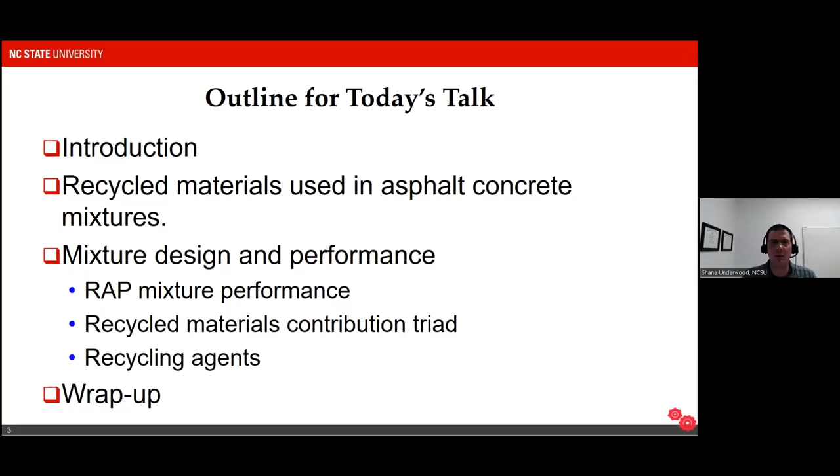So if we start with an introduction, when we look at the US and why we might be interested in recycling materials, it largely comes down to the scale and scope of our pavement transportation network. In the US, the pavement network is the largest civil infrastructure investment that our country has made. It consists of about 3.7 million kilometers of paved roads. Most of those are paved with asphalt, at least at the very top surface layer. If we look at the number of lane kilometers, it's close to 10 million lane kilometers in the US.

Each year in this country, by some estimates, we spend about $32 billion in US currency just on the materials that we use in those pavements. That does not constitute the additional 130 billion or so that we spend on the engineering, on the management, on the delivery, and other aspects. So we have a substantial investment in our infrastructure system here in the US, and a large portion of that investment goes into the materials that we use to pave our asphalt or our roads.

In the US, we also produce a lot of asphalt concrete. About 382 million tons are produced each year. That works out to be around 1.6 million tons per day if we're looking at normal production days, which is quite a lot of asphalt concrete to produce in a given year. And those productions go to repaving operations or new pavement construction. We have lots of different applications that we use for those asphalt concrete mixes.

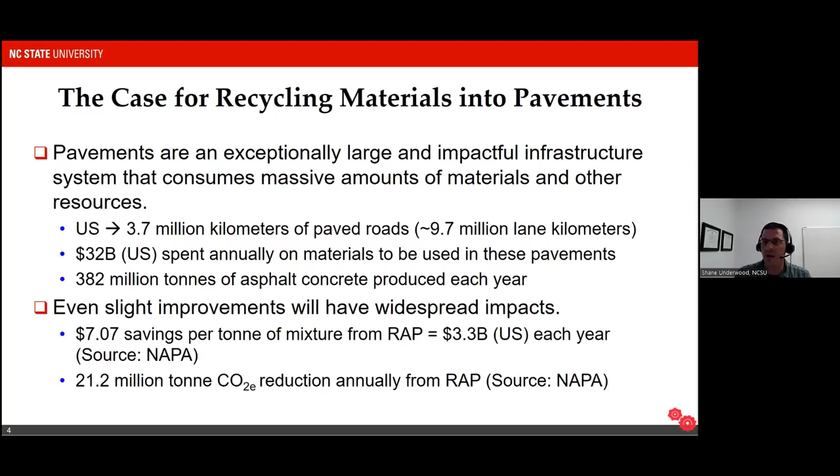Now, I've given you some benefits from an economic perspective and from an environmental perspective. But really, one of the big questions and one of the big themes of my talk today is a question about what is the total net benefit that we achieve when we use recycling materials. There is clear evidence that we obtain good initial reductions in environmental impacts, reduction in the cost of these materials. But what about things like cracking or rutting? As I'm going to talk about today, there is evidence that sometimes these recycled materials can lead to more cracking, perhaps less rutting, but so that's a trade-off. We might be experiencing some lower costs and lower net initial environmental impacts, but if the pavement is cracking and not lasting as long, then we actually have a net effect from using these recycled materials.

And so we want to think about those performance impacts across many different distresses, including, as I said, cracking and rutting, but also skid resistance. Asphalt concrete using reclaimed materials or recycled materials may have systematically different behaviors in terms of macro texture, in terms of friction behaviors, because the effective asphalt contents are different, because the mixes themselves might end up being finer. So we need to be worried about that. And this is growing in importance in the US as we talk about driver safety and pedestrian safety. We also need to consider how repairable these materials might be. Not in the case of RAP, but there might be some other recycled materials that turn into being challenging to recycle or reuse, and we need to think about that.

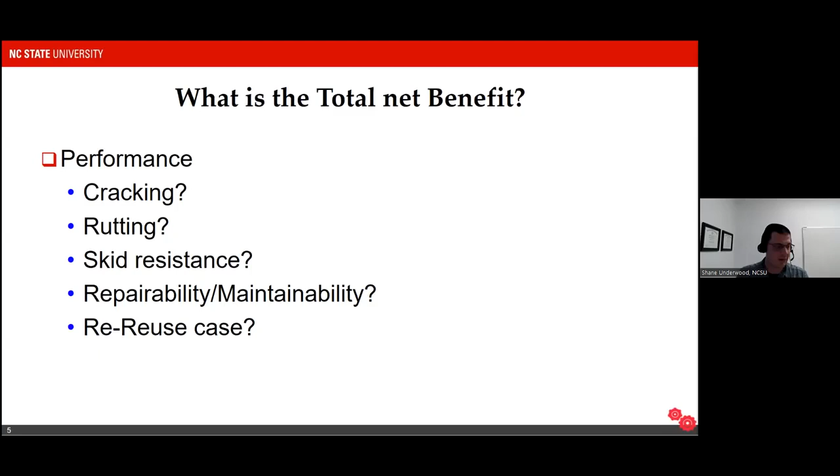So with that, let's transition to the next part of the presentation. What materials are commonly recycled into asphalt pavements? Well, we actually recycle a lot of materials into asphalt pavements. I think in the US, but also internationally.

I do not know what the Bolivian experience is with recycled materials specifically, but I know that it is widespread nationally to use recycled materials in some form or fashion. Usually owing to the fact that the system is so large that we're able to incorporate recycled materials pretty effectively. The first material I'll talk about is reclaimed asphalt pavements.

Reclaimed asphalt pavements, or RAP, are generally used in centralized plant-produced asphalt concrete mixtures at rates up to about 50%. Now, the 50% usage rate is considered high RAP in the US. As I'll talk about later, the typical dosage rates are much, much lower. I'm talking here also about RAP that is transferred back to a centralized plant and is mixed at that plant.

There are also applications of using reclaimed asphalt pavements in place recycling. I'm not going to spend any time on that. It is a prevalent technology here in the US and elsewhere, but I'm going to focus exclusively on centralized plant-based reclaimed asphalt pavement recycling.

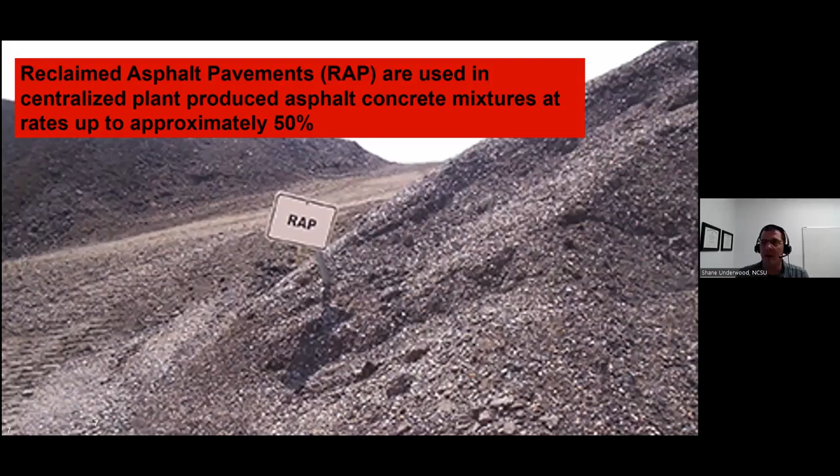Now, there are some facts that are important to know about recycling reclaimed asphalt pavements. Asphalt concrete pavements in general are considered to be 100% recyclable. We recycle a lot of asphalt pavements back into mixes here in the US. For the most part, 94% of the time, those materials are recycled back into pavements.

So a circular use of these reclaimed materials is an important part of why reclaiming asphalt pavements is so important. Most of the time, those recycling processes are used to bring the reclaimed asphalt pavement back into asphalt concrete. So a truly recycling application. A portion of those 94% recycled rates incorporate using RAP into aggregate bases or using them as shoulder repair, but the vast majority are recycled back into new asphalt concrete pavements to create a circular use of those materials.

In 2019, the last year that data was available on these recycled rates, we recycled in our country about 89.2 million tons. And I will emphasize that those are US tons, not metric tons. So less in terms of metric tons, but nearly 89 million tons of recycled material.

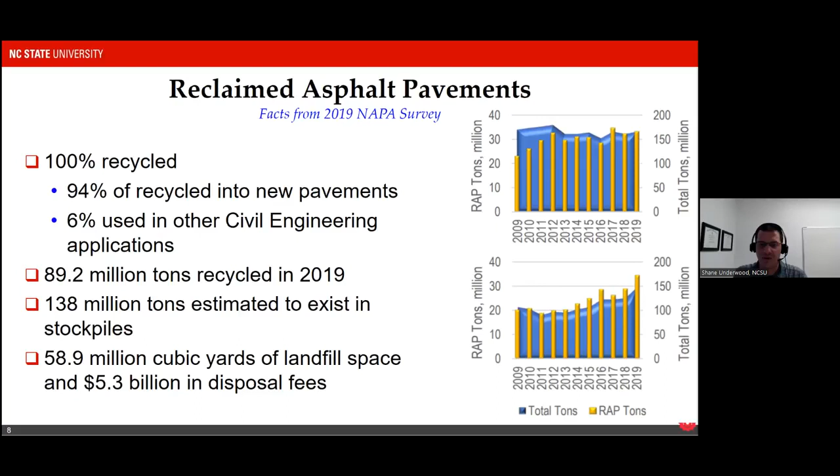Also see that not every state is as permissive as North Carolina is. So for example, the state of Arizona here in the western part of the US uses a lot less RAP. This state, at least the southern part of that state, is quite hot, and their concern stems from the embrittlement that may occur when RAP-based materials are utilized. If you average the dosage rates across the US, this comes out to be about 20%, which is used, again, across the US with quite a bit of variation depending on the exact state.

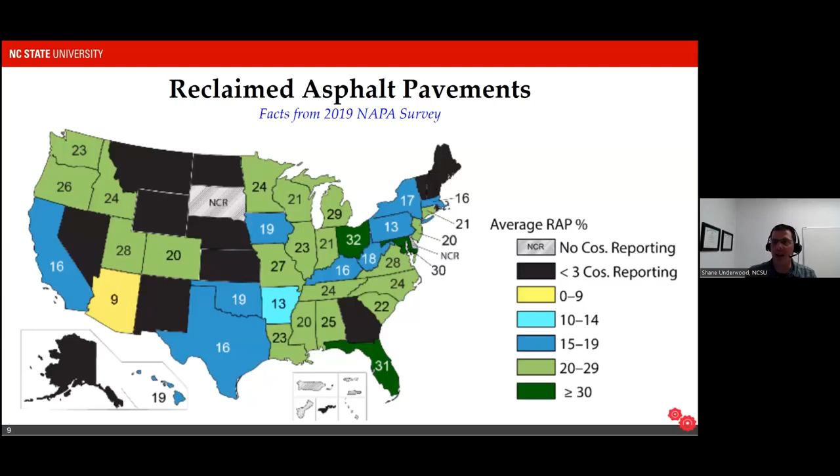ABC stands for aggregate base course, and it basically is the use or incorporation of reclaimed asphalt pavements into the aggregate bases. Now, this has some benefit because usually RAP materials are very fine graded, which means that they compact very densely, and depending on the time of year when they're placed, you may get some minor amount of cementing action from the aggregate base.

This is generally considered to be positive, but you also can look at the alternative, which is using reclaimed asphalt pavements directly in asphalt concrete mixtures, which has a higher net benefit. So there aren't a lot of states that use RAP in aggregate base as a normal operation, and part of that has to do with the value statement of using it as an aggregate versus using it in a more high value layer like the asphalt concrete directly.

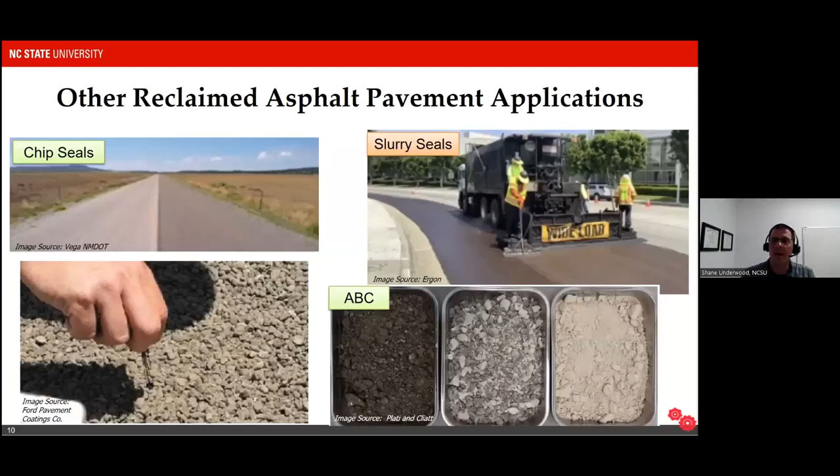A related material with RAP is recycled asphalt shingles. These are shingles that are either removed from the roofs of someone's home during a roof replacement, or they may be reclaimed from a manufacturer's waste. When manufacturers create shingles, they may actually produce quite a bit of waste that can be incorporated and used in asphalt concrete.

Technically, RAS is incorporated at up to about 5% dosage, much smaller than RAP, but the asphalt content for a typical shingle is much higher. A typical reclaimed asphalt shingle might have something between 20 and 30% asphalt binder content, so you use lower amounts of the shingles and get a total net benefit in the binder content.

As you can see in the images on the screen, there are issues that have to be dealt with, especially when we use tear-off or post-consumer waste materials. You can see these gentlemen in the upper corner dealing with leaves, backing paper, and lots of different components in this waste stream, as you would imagine from a construction site. You can also see in the image on the left all of the paper and waste materials that come with roofing replacements.

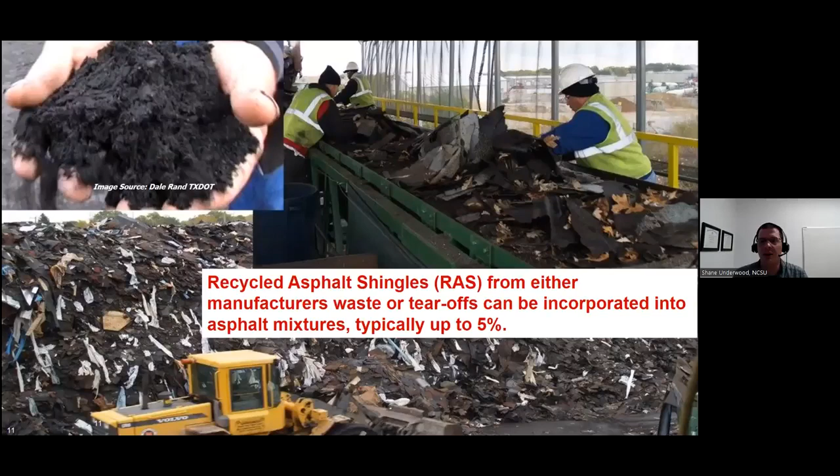Another image here just emphasizes that there are two streams of asphalt shingles. The so-called post-consumer asphalt shingle is taken directly from people's roofs. This material may have been sitting in service for 10, 15, 20 years, so it's going to be stiff, and it's also going to be much more varying in terms of composition and behavior. We can contrast that with manufacturer waste shingles, which are produced during the manufacturing process and represent a much more consistent stream, considerably less oxidized or aged, so they're a little more capable of being used in asphalt pavements.

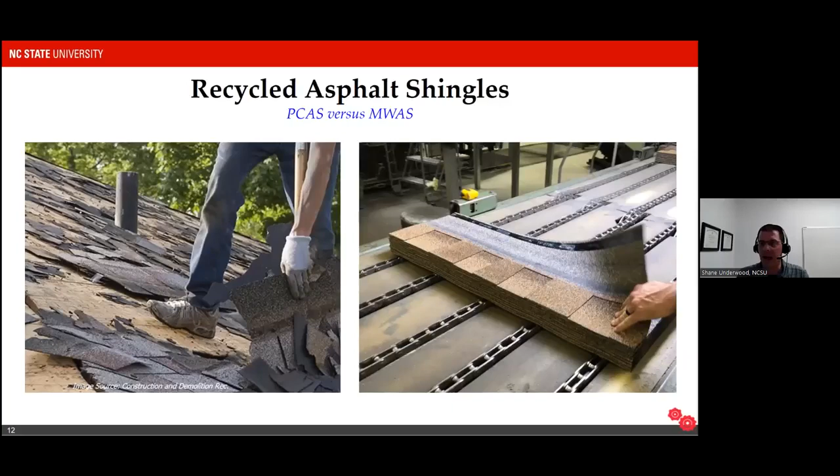The use of asphalt shingles has declined somewhat in the US in recent years. One of the reasons for the decline in asphalt shingle use has to do with the rheology of those materials.

So here I'm showing you a photograph from one of our students at NC State who was working with a manufactured waste shingle. This is actually the softer of the shingles, and this binder can, although it doesn't look like it, is actually heated up to about 150 degrees Celsius. You can see just how stiff and immovable this material is.

That's even more evident on the right. Again, keep in mind, this is binder that is heated to 150 degrees Celsius or more and still behaves as a brittle solid material. So we've got big challenges when it comes to using reclaimed asphalt shingles or recycled asphalt shingles because their rheology is so very stiff.

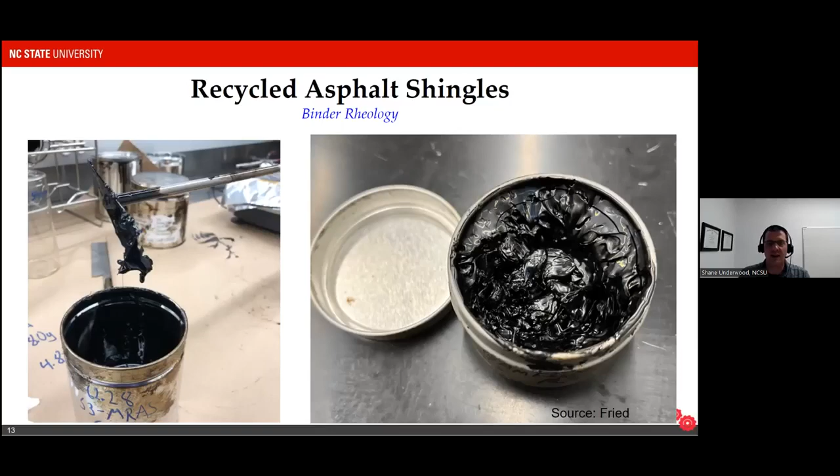There have been several studies to look at this issue. I'll show you at least one here to give you an idea. For those familiar with the USPG grading system, there have been various researchers who have tried to PG grade reclaimed asphalt shingles, and here are just some examples. A typical high temperature grade for North America would be a PG 64 binder.

You can see these numbers are degrees Celsius. If you're not familiar with the grading system, the fact that these numbers are almost two-thirds or twice as large as a typical grading tells us that they are very stiff, giving PG grades up to, in some cases, 175 degrees Celsius. This happens to be a post-consumer shingle, so this shingle would have been in this case, Alabama, in the southeast US, for up to 20 years and had aged quite a bit in that time.

Now, if you've ever run tests on asphalt binders that are this stiff, you'll know there's quite a bit of uncertainty associated with the very fact that it's so very stiff a material. So these numbers we should treat very cautiously. But what you can see is that the numbers are very high, much higher than typical, and they also range across a pretty broad number, from 121 up to 175.4.

So incorporating those materials into asphalt pavements, you would expect very different properties for the mixture using this high stiffness RAS versus a relatively lower stiffness RAS from the Minnesota case. This is just one study, probably about another half dozen studies out there that basically conclude the same thing: recycled asphalt shingles are very stiff, slow to rise, and may or may not actually be liquefied at a typical dosage temperature we'd see in an asphalt plant.

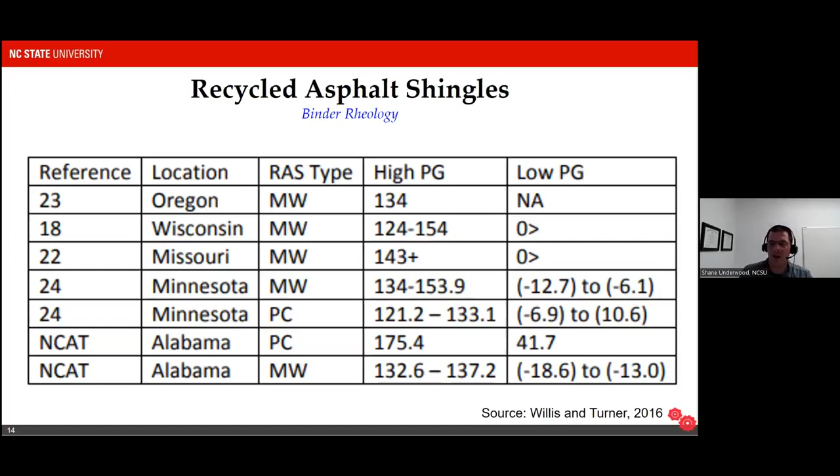A second challenge in dealing with RAS has to do with the aggregate particles themselves. The aggregate particles used in shingles are not necessarily as angular as the ones we use in asphalt concrete, but they can also have very different gradations than we typically see in the sand stockpiles we use to make asphalt concrete pavements.

I'm showing you one example of a case of 3 mixes: one having no RAS, this is just the gradation size, one having 4% RAS, and one having 3% RAS. I want to call your attention to the fact that in this 3% RAS case, we have this hump gradation right around the restricted zone in our gradation band. This hump gradation is a characteristic telltale sign of natural sands that will not compact well.

In fact, we see in this particular mix that it behaves very tender. This mix was very tender, whereas this other mix that had even more RAS, but from a different source, we don't see that tender behavior, and we don't see that change in the gradation band. So we have to be very careful when using recycled asphalt shingles, both in terms of how stiff the asphalt binder is, but also the gradation of the sand particles used in that shingle. All of that has to be taken into account and considered.

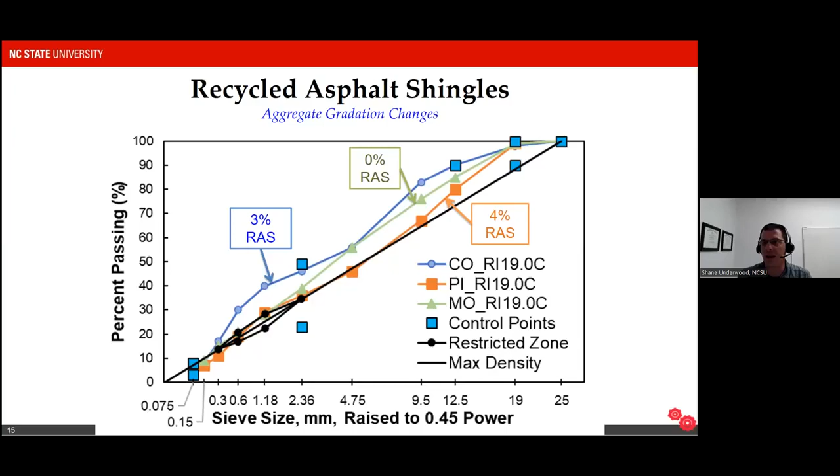Now, besides reclaimed asphalt pavements and recycled asphalt shingles, which are really important because they have asphalt binder with them, so we can get some potential benefits if we can mobilize the binder effectively, we also use other recycled materials. One of the hot topics in the US in the last 3 years or so has been the use of recycled plastics into asphalt concrete.

Now, the idea of using recycled plastics is not particularly new. There are examples of using recycled plastics at least as early as the 1970s. Those exist in 4 different countries that I found in our review, and there are probably more that I've missed, but we see usage in Europe and the US.

You also will find examples, especially in India, of the use of recycled plastics in one form or fashion in asphalt concrete at various times. Okay, so these plastics are being used. It's being extensively evaluated, and I'll talk about the types of plastics that are used.

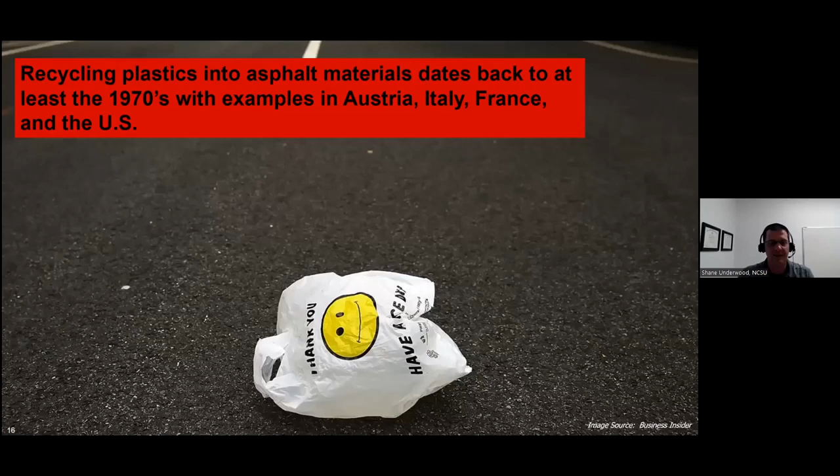Many of you are probably much more intimately familiar with the properties of plastics, but I'll dive into that just a little bit for those of you who may not be as familiar with recycling of plastics and the nature and properties of those. So when we think about plastics, we have to think about what kind of plastic it is, because as you all know, plastic is not in and of itself a material. It's a class of materials made up of varying polymers of varying length and complexity. That's usually indicated by the small little recycling symbol that you might see on your plastic water bottles or otherwise, that gives us an idea of what kind of plastic this is.

And I've put in this slide a couple of pieces of information that I think are going to be useful for us. So in the slide, we have the number. Normally in a plastic, you would see a small number on the inside of this triangular arrow. If that number is 1, then we have PET. If it's a number 2, you have high density polyethylene, and so on and so forth. Now, each of those materials has different applications, but they also have different melting points. I've highlighted 2 of the rows in this table because 2 of these are of actual importance to us in asphalt concrete. The first is high density polyethylene.

High density polyethylene is the kind of material that we use in pipes that you might come across in playground equipment and things like that. You might also find high density polyethylene in very, very stiff plastic bags, or even some soft bottles that we might encounter. The other kind of plastic that's relevant is low density polyethylene. Low density polyethylene is the very thin plastic bags that we might use for wraps around food. We might use low density polyethylene bags for shopping purposes or other kinds of things. And what you'll notice about the high density polyethylene and the low density polyethylene is that these tend to melt at about 130 degrees Celsius, or in the case of low density polyethylene, somewhere between 110 and 120 degrees Celsius.

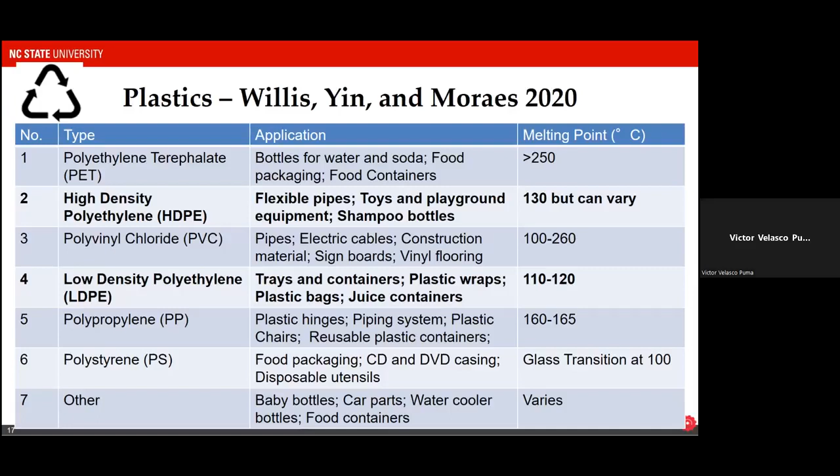Now, with plastics and recycling plastics, there are two basic processes that are used, the so-called wet process and the dry process. In the US, we're most interested in using the wet process. The wet process is essentially a case where we're incorporating the plastic directly as asphalt binder modifiers. So think of this akin to using SBS modified asphalts, where those plastics are directly incorporated into the asphalt binder.

That's typically done at a dosage rate of about 2 to 8%, and we'll generally use low density and variants of low density polyethylene. So we're generally going to be using, for wet process analysis, polyethylene materials.

In the dry process, we actually will use the plastic as aggregate replacements. Now, in this case, these plastics are going to be very high melting temperature, very stiff, well cross-linked polymers like polypropylene, polystyrene, and the PET that I described earlier. These materials have to stand up to temperature production issues but can be used in applications. Again, not very common in modern usage in the US. I believe this is a pretty common way of using plastics in some Indian applications, however.

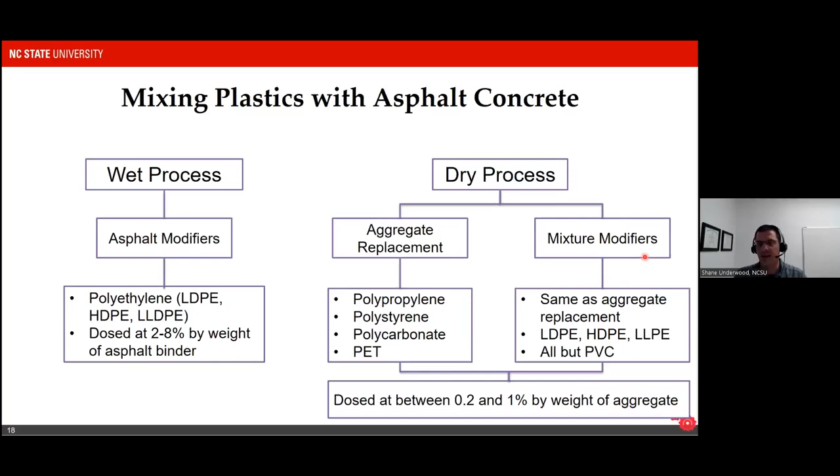So we do have different methods. Again, in the US, most of the interest in using recycled plastics in recent years has focused very heavily on using the wet process. There are applications of using the dry process, treating them as mixture modifiers, where we can add it directly into the mixing drum as a filler-based aggregate or admixture.

I'll point you to one excellent resource for more information if you're interested. And this is an article or a book that's freely available online, produced by the National Asphalt Pavement Association. Some of you may be familiar with this, but this was a bit of work produced by NAPA and the National Center for Asphalt Technology. They lay out a lot of the issues and limitations with using recycled plastics, including the issues that I list on the left side of the screen.

So one of the challenges with using recycled plastics is that there is not an entire system built around specifying and sourcing the recycled plastics. Right now, it's very much being used in a research case. So you might see examples of DOTs using them, but they're using very special provisional specifications. We don't have standards to describe the specific gravity measurements of recycled plastics. There are not established standards in the AASHTO or in our transportation agencies to deal with melting temperatures and differentiating between alternative plastic sources and their differences in melting potential.

We also don't have established methods in the transportation community to deal with ash content of post-industrial recycled plastic versus post-consumer recycled plastic. So there's a lot of unknowns in dealing with sourcing of these materials. It's easy for us to say we're going to use a load of recycled low-density polyethylene, but there's a lot of engineering differences between the materials that might collectively be classified as low-density polyethylene.

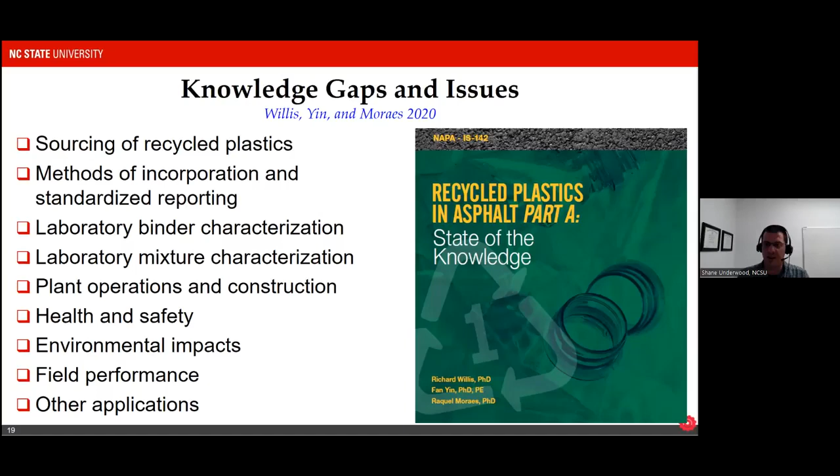Another material that we often use, this comes in and out of fashion every 10 years or so in the US, is rubberized asphalt binder and terminal blended asphalt rubber. We use these to eliminate tire waste. Generally, the beauty of using crumb rubber or rubberized asphalt is that it not only uses a waste stream, but unlike some potential for recycled materials, using this waste product actually improves the asphalt concrete itself. So it's a double benefit. You reduce environmental impacts, but you also create a longer lasting asphalt material.

So crumb rubber, we use about 15,000 tons, that's US tons, in the US. In the case of rubberized asphalt, those dosage levels are usually around 20 to 25%, coupled with a gap-graded asphalt gradation. The state of California has been championing the use of terminal blended asphalt rubber in dense graded mixes at dosage levels in the order of 5 to 8%. They are not necessarily getting the benefit from the performance of the rubber at those low dosages, but they definitely get the environmental savings of finding a positive reuse for the rubber materials.

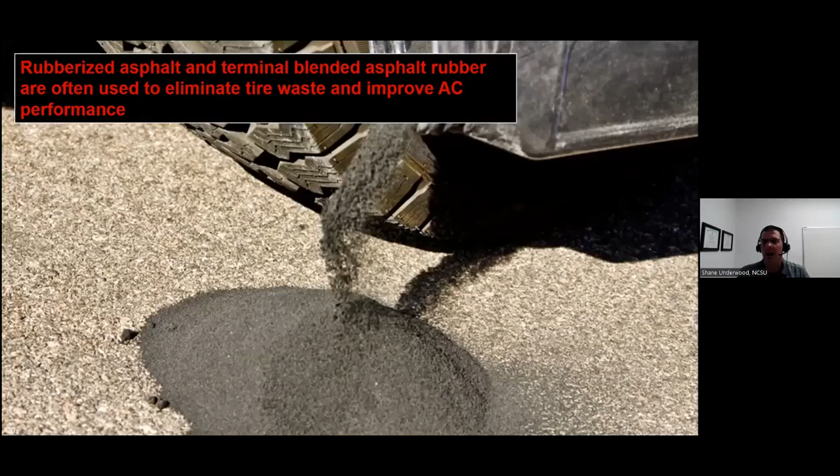Again, not in as much favor as it was 20 years ago, but there are also examples of using rubberized friction course. These are usually open graded friction courses that help to cut down on pavement noise. In the city of Phoenix, where I used to live, the freeways in that city were all covered. This was probably 15 years ago or more, with a surface of about 25 millimeters of rubberized friction course. And this cut down on the noise considerably. If you've ever been to the city of Phoenix, you know that the homes are usually built right up against the freeway. Those were topped with Portland cement concrete, and then this rubberized surface course was placed on top and cut down on the noise significantly. So much so that the citizens actually voted to increase their taxes to pay for more widespread usage of these materials.

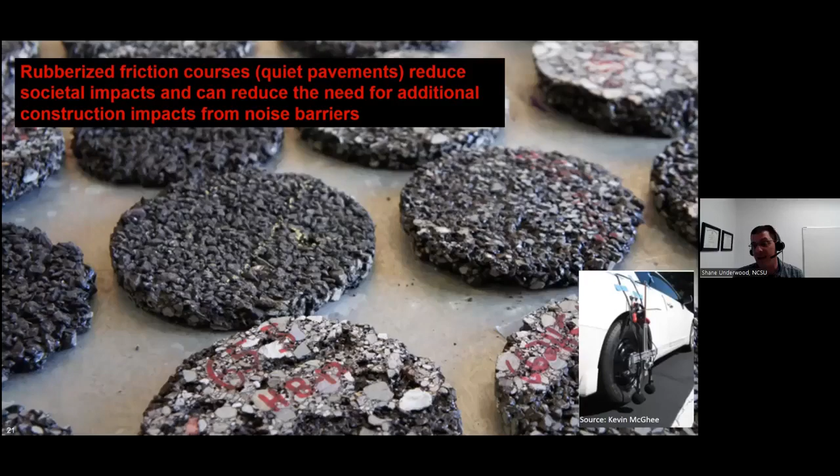These are the main recycled materials that we find in the US: RAP, RAS, rubber, and in a growing way, plastics. But there are lots of other materials that we use as well. One of them of note is called glassphalt. Glassphalt essentially includes processed glass as an aggregate replacement. This is used extensively at a time in the city of Baltimore, in the Northeast, more in the Northeast and Mid-Atlantic part of the US.

It's not widespread, mainly because the economics don't often work out. In order to make glassphalt economically viable, you usually have to have a municipal glass processing plant and a municipal asphalt plant, because there, as a city, you're diverting the waste stream directly to another source of material that you as the city are buying. But not many states find this as an economically advantageous use of glass. One of the minor issues that we worry about on glassphalt is skid resistance, because the glass particles themselves have a very low microtexture. That's usually controlled by keeping the volume at a fairly low value. You'll also see glassphalt used in non-roadway applications like sidewalks, parking lots, some residential streets, etc.

There are also examples of using coal and non-coal combustion byproducts like fly ash. We know fly ash is used extensively in Portland cement in order to lower the environmental footprint of that material. But there are also examples of using fly ash in asphalt concrete. In the US, this amounts to about 11,000 tons in 2019. The material is just metered in as a normal material would be, but it's not very widespread. Only a few states are doing it, but there are examples where this is a viable waste stream.

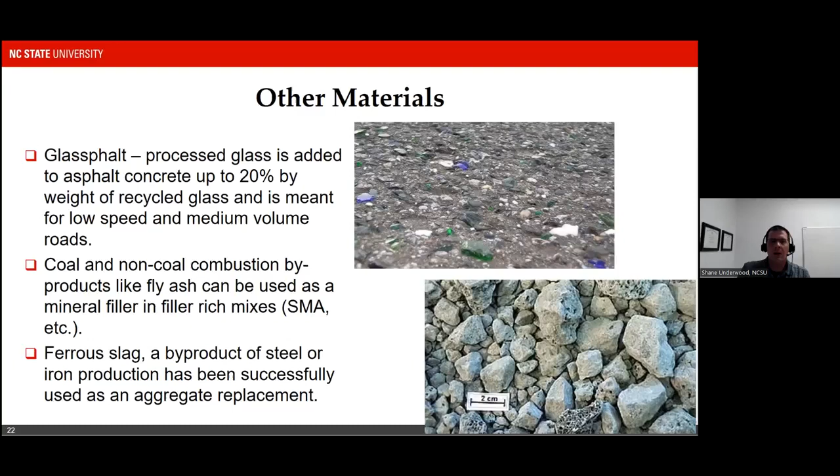All right, I'm going to shift gears a little bit now to talk about performance. So I've given you background on what materials are often used in asphalt concrete pavements, and I want to talk a little bit about an important component, which is the performance of these materials. I'm going to talk specifically about RAP, but this applies to all recycled materials.

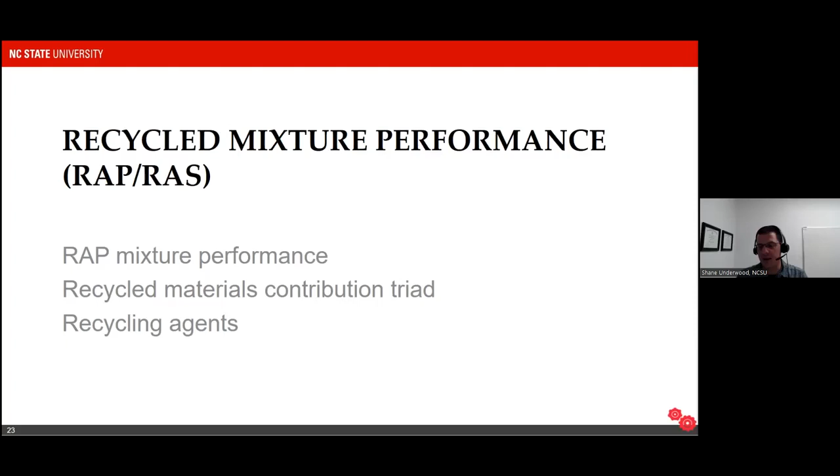We can see a major net benefit of using recycled materials. There's an economic savings, there's an environmental savings, but what's really important to think about is whether or not the long-term performance benefits are there. Because even though it may cost less and it may have fewer impacts, if you're having to replace the material more often, then the actual benefit is lost, and you don't have that in the long term.

Now, if you look in the literature, you can find literally thousands of papers on whether or not reclaimed materials perform better or worse. And the net outcome of all of those studies is it depends. Some studies find that reclaimed asphalt pavement materials perform adequately or equal to non-RAP materials. Some show that they perform worse. The general consensus is that RAP-based materials perform better when it comes to rutting and permanent deformation, but not always—there are plenty of studies that tell us something different. The consensus is also that RAP-based materials have the potential to increase the brittleness of our materials and therefore negatively affect the cracking performance.

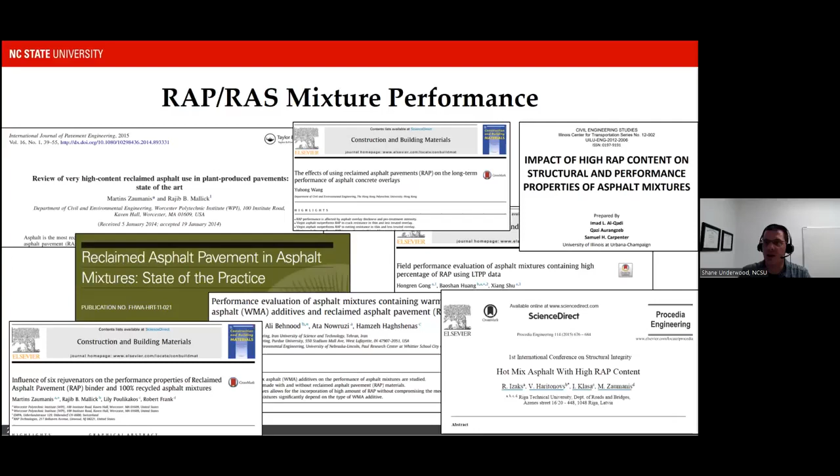I want to talk about one small study that we did some years ago now for the state of North Carolina to investigate this. So what we did in our study was we obtained typical mixtures from the state of North Carolina. We obtained surface, base, and intermediate mixes. And then we obtained for those mixes so-called RAP equivalents.

Now, the RAP equivalent mixtures are produced using the same basic component materials, but using a mix design that incorporated RAP aggregates or RAP material into that mixture. Now, in our study, we used a fairly low RAP content, about 15%. Remember, this was done several years ago when that was a typical dosage rate in the state of North Carolina. That dosage rate has now increased to closer to, as you saw in the previous slide, about 24% on average. But we were looking at a fairly modest RAP dosage rate of 15%.

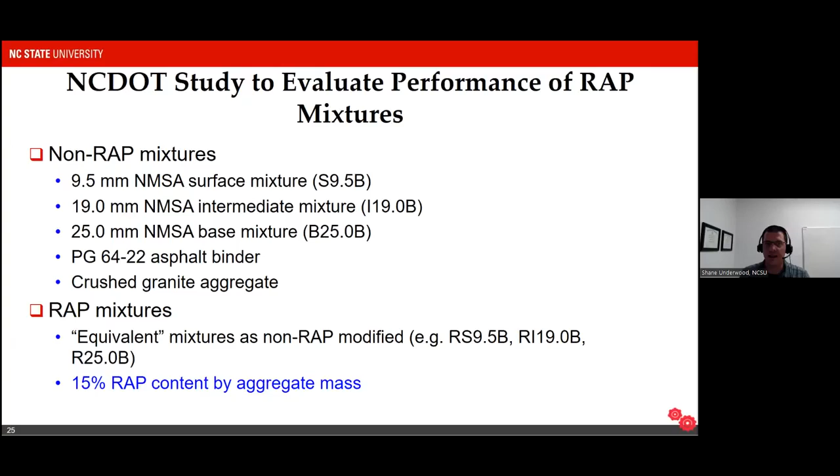Now, if we wanted to look at the performance of the RAP mixtures, we had to do a series of laboratory experiments. So what we did were AASHTO TP 132, which is dynamic modulus testing. We did axial fatigue testing and permanent deformation tests. We basically wanted to figure out how stiff the materials were, how likely they were to experience fatigue cracking, and then how likely they were to rut and permanently deform. I'm not going to get into the details of how those tests are conducted. I hope you're somewhat familiar with, if not the tests themselves, at least the idea that we need to understand the modulus of the material, the fatigue resistance, and the permanent deformation resistance.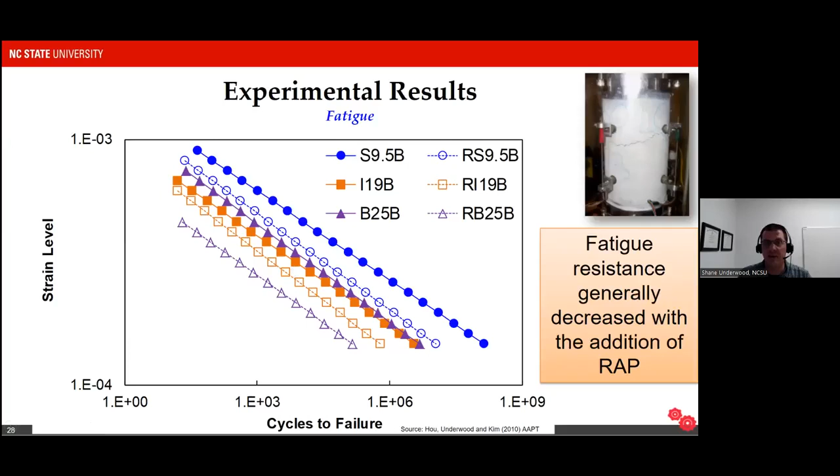When we look at permanent deformation, the behaviors look the opposite. Here again, the RAP-based materials are the unfilled symbols, the non-RAP materials are the filled symbols, and you can see that under the prescribed loading, we accumulated less permanent strain with our RAP-based materials than we did with our non-RAP materials. The exact differences vary whether we're dealing with a surface mix, an intermediate mix, or a base mix. So let's step back for a moment. The experiments show us that for these particular materials, when we add RAP, the material gets stiffer, more resistant to permanent deformation and possibly rutting. But the counter is that they're possibly more likely to crack when they're used in service.

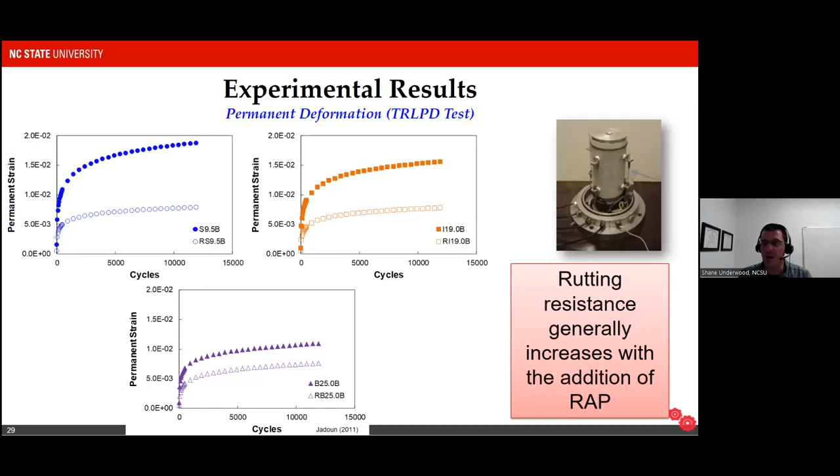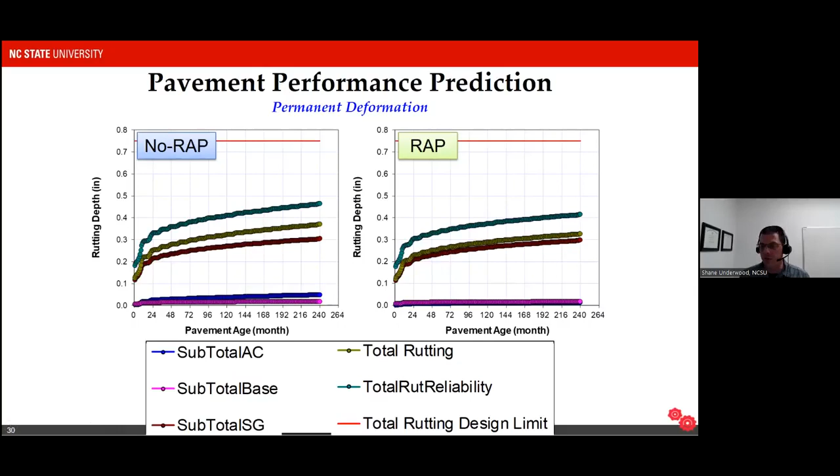Because we tested these particular properties of our asphalt mixture, we were able to use them in a pavement performance simulation. We used the AASHTO Pavement ME software, which at the time we did this was known as the MEPDG, to predict the long-term performance of our pavements made with those materials. Here we're comparing the no RAP versus the RAP, and you can see that the no RAP pavement has more rutting, almost half an inch, versus the RAP-based mixture experiences a lot less rutting. This basically confirms the idea that adding the RAP would likely improve the rutting performance of our mixture, which is a good thing.

In the case of fatigue, however, we see a different behavior. In this case, we have cracking reaching about 25% in the no RAP case at the end of a 20-year period. But in the RAP case, we actually reached that same cracking threshold in about half the time. So using the RAP-based material has a negative consequence of increasing the cracking propensity of the material. Now the question becomes, is that still a net negative or not? Is it okay that we have less performance because of all the savings we get up front in terms of cost and in terms of environmental footprint?

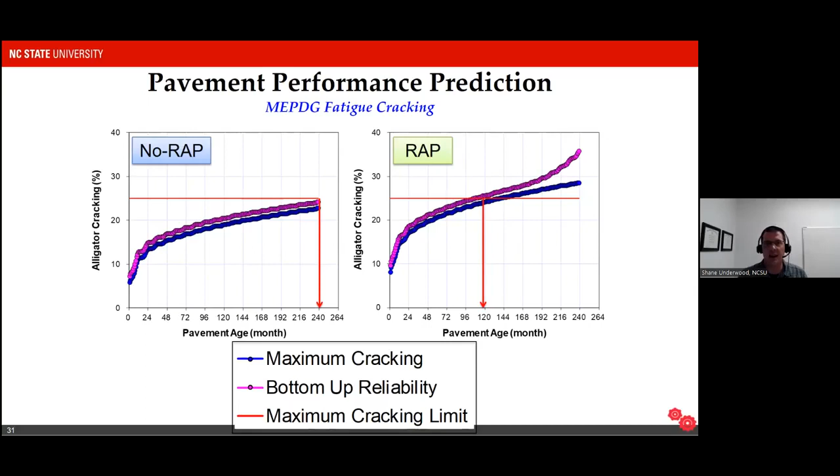Fortunately, we can take a look at that. We can actually figure out whether we're likely to observe a net benefit or a net detriment. We did that using an established life cycle cost analysis with RealCost software. If you're not familiar with this, it is produced by the Federal Highway Administration. It's considered to be a vetted and approved method of estimating life cycle costs. We also looked at the environmental assessment using, again, a tool produced by the Michigan Technological University to estimate the emissions from using these different materials.

Then we asked ourselves a couple of questions. First, what would happen if we use the no RAP mixture and the rehabilitation schedule consistent with no RAP mixture performance? Basically, what does the no RAP baseline look like? Because this is our target. We want to make sure that whatever we're doing with recycling materials, it's at least no worse than our regular non-RAP mixture. We wanted to look at the hypothetical case that we use RAP, but it performs equally as well as the non-RAP. Then we wanted to look at what happens with the RAP, given the inferior performance that we would achieve. And then what would happen if we use the RAP mixture, but we acknowledge that the performance is lower and we adjust those conditions.

I'm going through this a little bit quickly, but basically what you can take away is we saw differences in performance, and then we wanted to evaluate the life cycle cost impacts of those differences in performance.

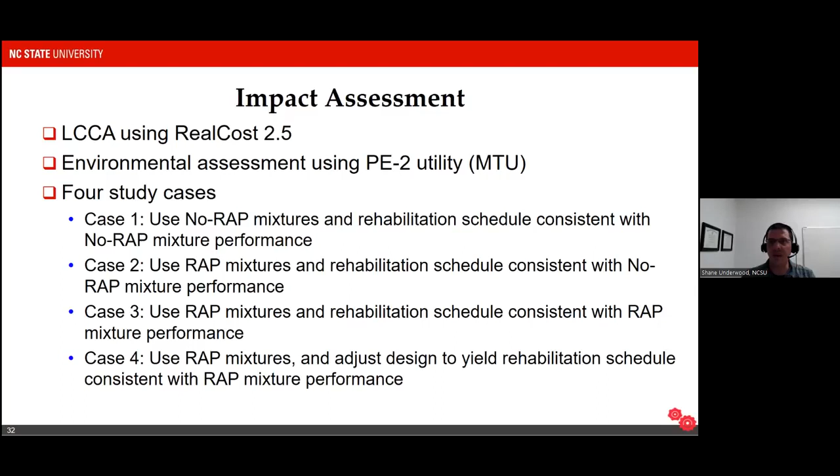So we designed, on the basis of the performance prediction, different rehabilitation strategies that this diagram is summarizing. The details aren't super important, except that because the RAP material performs worse, we need more frequent maintenance or rehabilitation interventions, which is why in case 3, which accounts for the reduced performance of the RAP, we see a more frequent rehabilitation and repair schedule implemented versus the other cases where we just observe the performance differences.

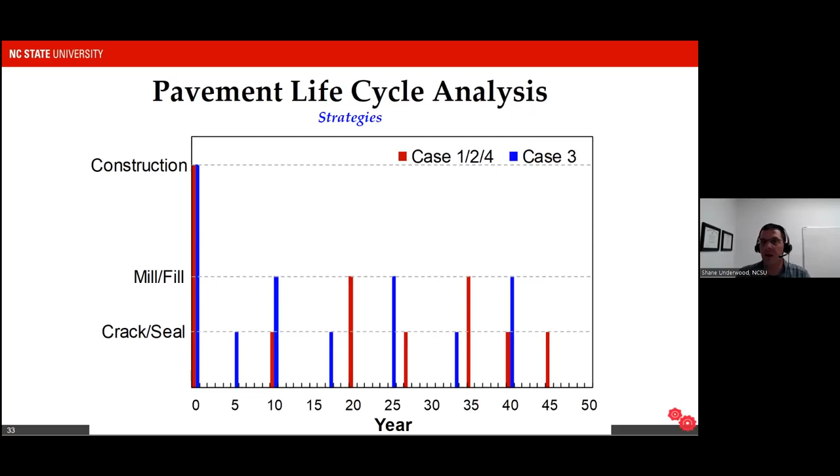I'm sidestepping the details to get to the main conclusion, which is that when we look at the costs of using RAP in these particular mixes—and this is specific to the mixtures we evaluated—the actual net cost of using recycled materials, because they're performing worse, was quite a bit higher than what we saw from the control mix.

The importance of this in a broader sense is to think about what is the life cycle impact of my design decisions today. While we may think we can achieve a lower cost because the performance isn't the same, we can actually see a much higher cost by adopting what seems to be a sustainable alternative material. It tells us we need to design these materials very carefully so we get better performance and don't just use them blindly as a substitution in the mixture.

This is the cost, the agency cost and user cost, again higher in both cases. Users experience more cost because there are more interventions, and so there's more delay in their schedule.

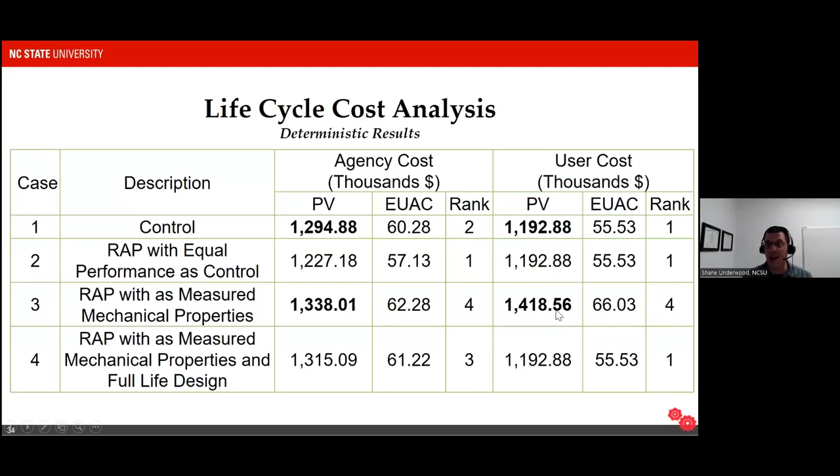We also see the impact in terms of environmental CO2 equivalents. This is our baseline, what we get using non-RAP mixtures. If the RAP performs really well, we get some benefit, but because the RAP doesn't perform as well, we get a net cost. Again, the takeaway is that if RAP materials don't perform as well as the non-RAP equivalents, there can be a negative consequence in terms of long-term costs and long-term environmental impacts.

Now, I don't want you to come away from my presentation thinking that RAP is always bad, because that is not the message I want you to have. The message I'd like for you to have is we need to think and be very careful with blindly adopting RAP materials.

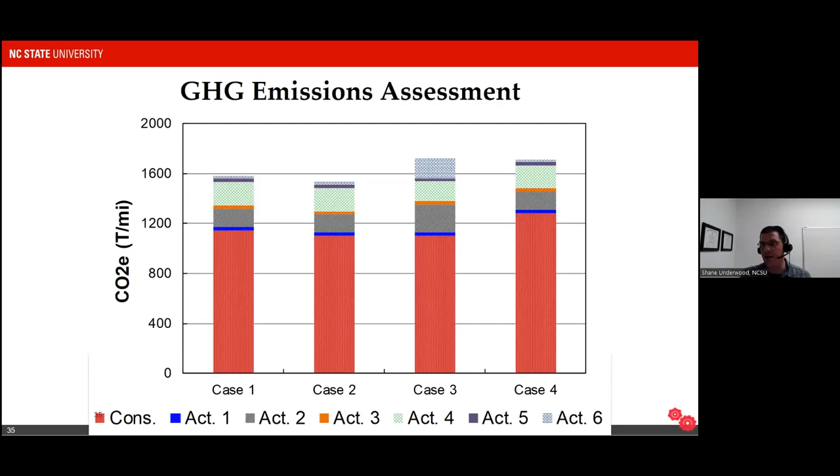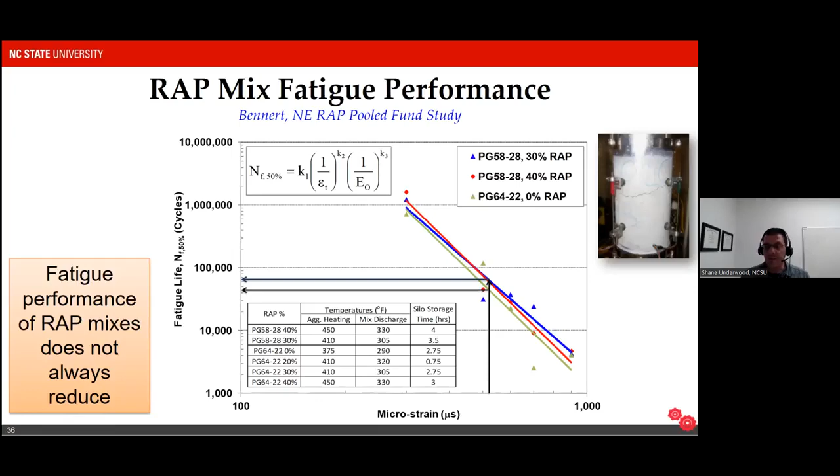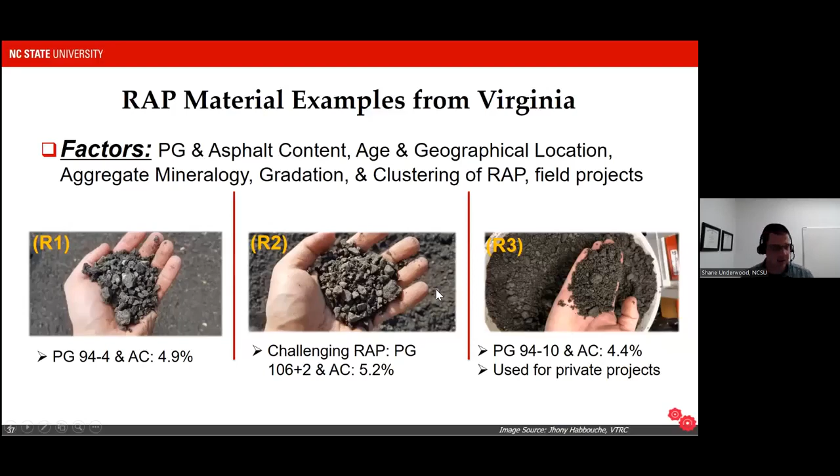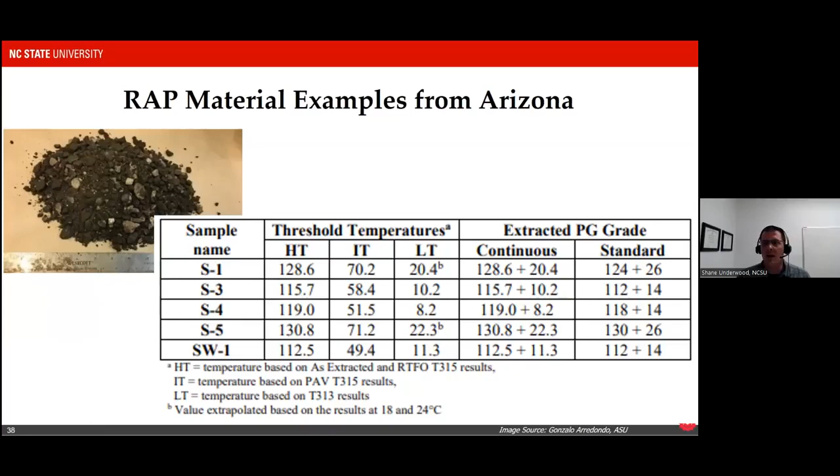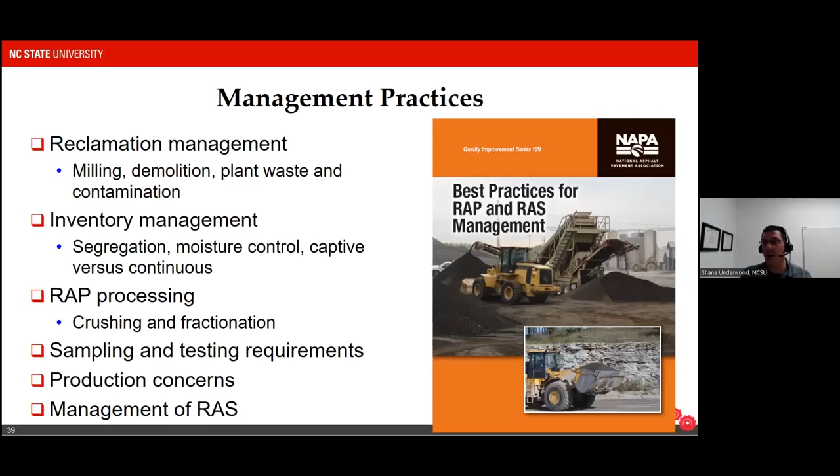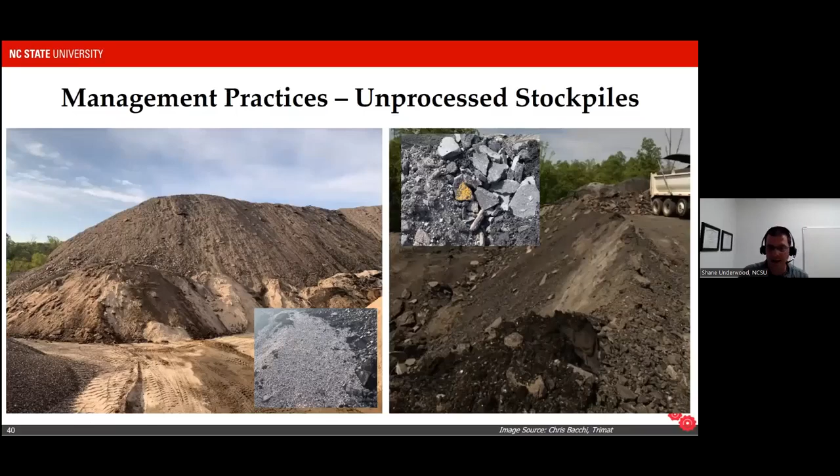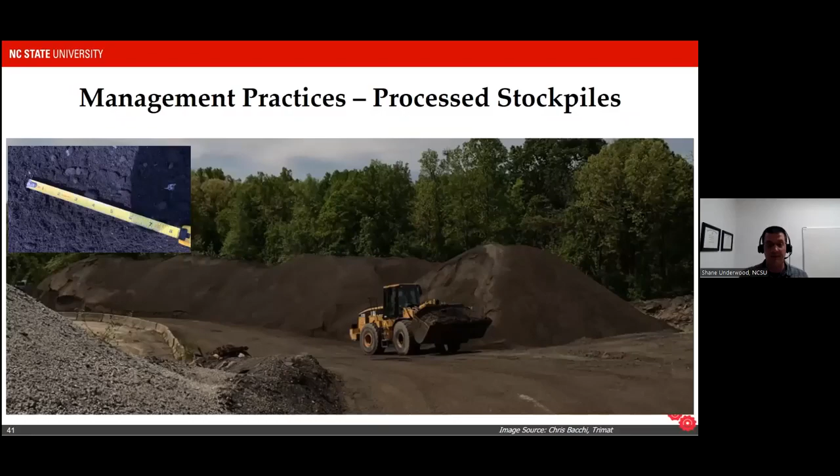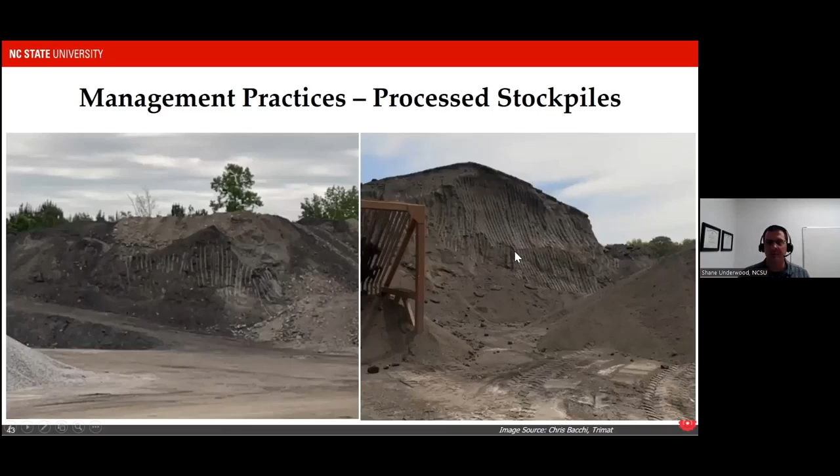And finally, there are issues related to RAS. So we've got RAS that has to be segregated, and look at all the nails and bits and pieces that are part of that RAS stockpile and are basically now incorporated into this processed stockpile of RAS. Also notice that this isn't covered, so water can get into that and strongly affect the capabilities of that RAS to be successfully used in asphalt mixture.

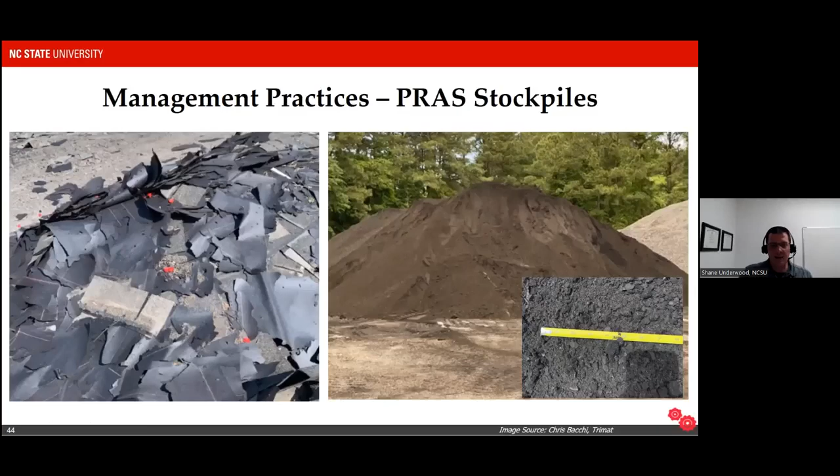All right. One of the things that highlights all of the issues that we see associated with wrap and RAS has to do with what I call the RAP RAS binder contribution triad, which basically says that we need to think about how much binder is available from those RAP materials, how much is active, actually available to blend, and then how well that blends together. Now, one of my colleagues, Dr. Castorena, has been doing extensive work to understand this triad over the last 5 or 6 years.

I'll highlight some of the main findings so that you can see why it's so important that extreme care be taken with these recycled materials. I'll talk about availability first.

When we think about RAP, we often think of it as aggregate that is black in color and that the binder is available to blend. But in fact, within RAP, there are these agglomerations. Now, these agglomerations actually are very stiff. It's almost impossible to break them apart with your fingers.

Because of that, those agglomerations hold all of the binder inside and make it unavailable to mix with the asphalt concrete mixture. And that's demonstrated in the schematic here. So we've got the surface asphalt that's available, but then we've got this internal section which is completely unavailable and not mixing with the asphalt concrete.

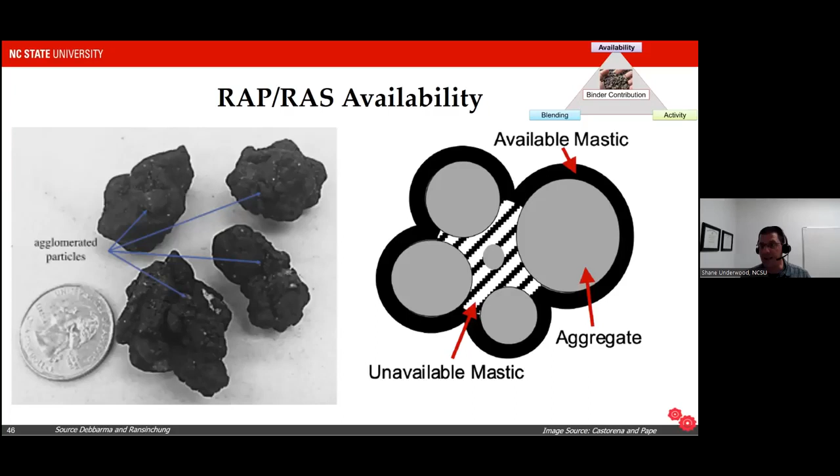Dr. Castorena and her student Sonia Pape have been championing a novel method where they actually use microscopy to look at how much binder is available. They can see, as in this picture, agglomerations of recycled material that are not becoming undone when it mixes, and they can actually see that through the microscope using X-ray techniques to measure the quantity of material in those samples.

I'm not getting into the specific details, but what they have concluded is that the availability for RAP varies quite a bit from one stockpile to the other—up to 80% in some cases. Those are cases where it's really available, doing a lot of good in the mix, all the way down to 50%. And when it comes to RAS, they may actually get no benefit from the RAS at all. It might not be giving you any binder—none of the binder's available in the mix.

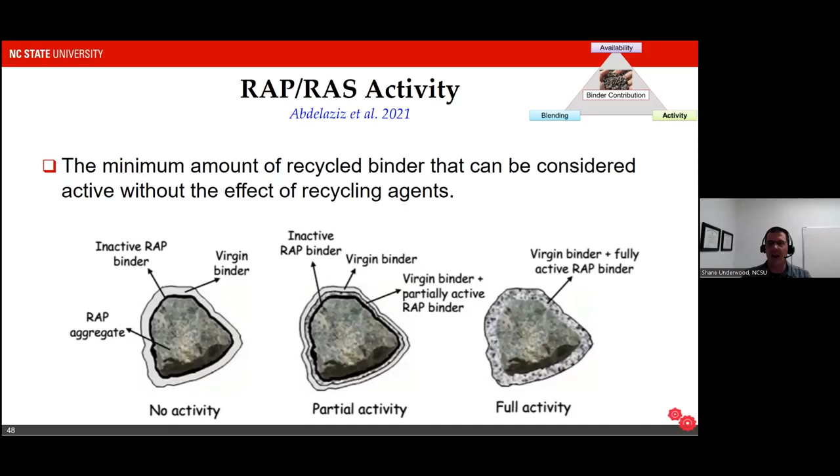In addition to getting binder available, that binder has to become active. This is an area that has been studied extensively by groups in Texas, as well as at University of Parma in Italy. They've been looking and trying to figure out, just because the binder is available doesn't mean it actually activates—you might not get enough heat transfer to make the binder blend in the mixture. In their case, they've developed a method using indirect tension testing to try and understand how much binder will become available.

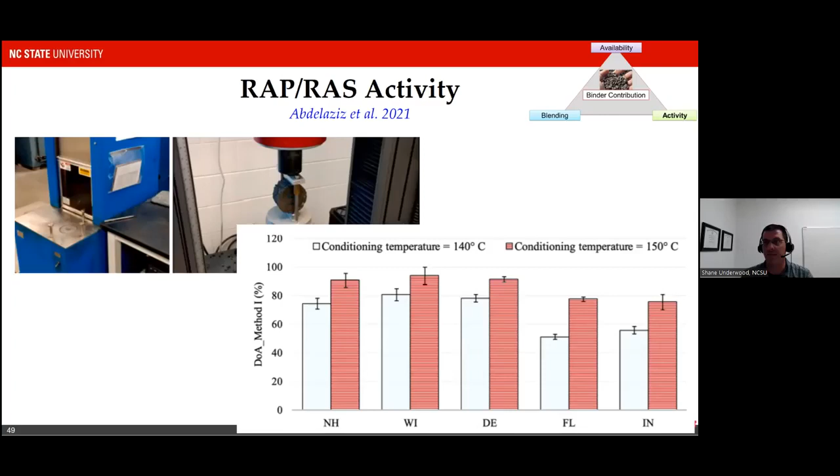They've been able to show that binder activity increases with temperature. So the practical application: if the material is processed at a higher temperature, you're more likely to get activity, and therefore that's going to improve the availability and the activity of the binder in the mixture, and you're going to get better blending. And if you get better blending, you get better performance at the end of the day. So when we have limited activity, the mixture may perform in an inferior way.

This becomes increasingly important when we start thinking about cracking, because when we develop the mixtures, we assume that the binder that's there is all acting—it's active, it's available, and it's contributing positively to the performance of the mixture. But in fact, the recent literature on this tells us that not all of that binder is active, and so we actually have a much lower effective binder content in our mixtures. Heretofore, we haven't been characterizing this, which is one reason you can see some mixes doing a very good job and other mixes doing a very poor job, because they're giving you different availability, different activity, and so on.

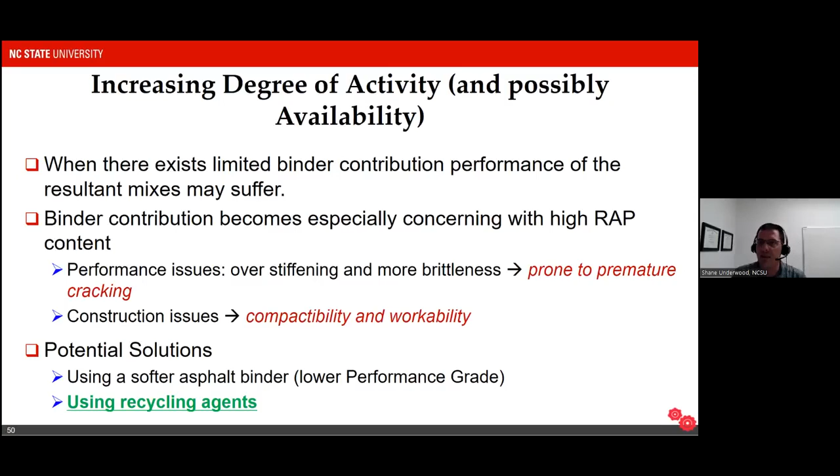Now, one strategy that has been becoming increasingly popular in the US is to use recycling agents. Recycling agents are an old material—they've been used in the US for many, many years, sometimes sold under different names. But the basic purpose of a recycling agent is to try and rejuvenate the mixtures and make the binders look like they originally did when they went into the mixture. So we're trying to reclaim or rejuvenate those asphalt binders. Sometimes these materials act more like softening agents, which is not what we want. Sometimes they act like extender oils, again, not what we want.

In the last, I would say, 5 to 8 years, there's been a considerable amount of work done—first at Texas A&M, ongoing work at University of Nebraska, at NC State and Virginia—to understand and classify different recycling oils. There are a lot of different products out there, and specifications are being built and developed all the time. This is a quickly evolving area, at least in the US, to try and increase that activity and availability of the asphalt binder.

We've looked at this a little bit in terms of the recycling agent study with Virginia. Here we're joining together rheological evaluations and chemical evaluations, and doing a lot of different study with recycling agents of various types and grades and different RAP materials. One of the things we're learning is that these recycling agents have very different impacts to rheology of the binder.

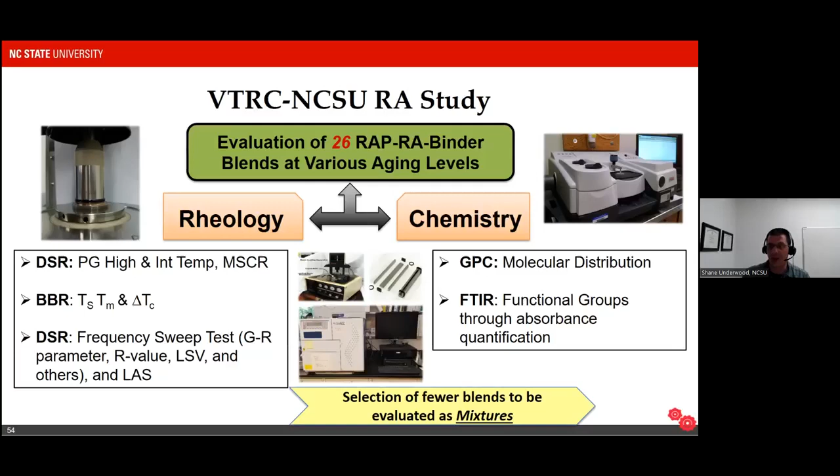So these recycling agents, the thing to think about is, how are they affecting the initial rheology of the system, but then how are they propagating and affecting the rheology in the long term? Because some of them may look really good early, but may not look very good later on in the life. And of course, we are interested in long life pavements and making sure that those work very well.

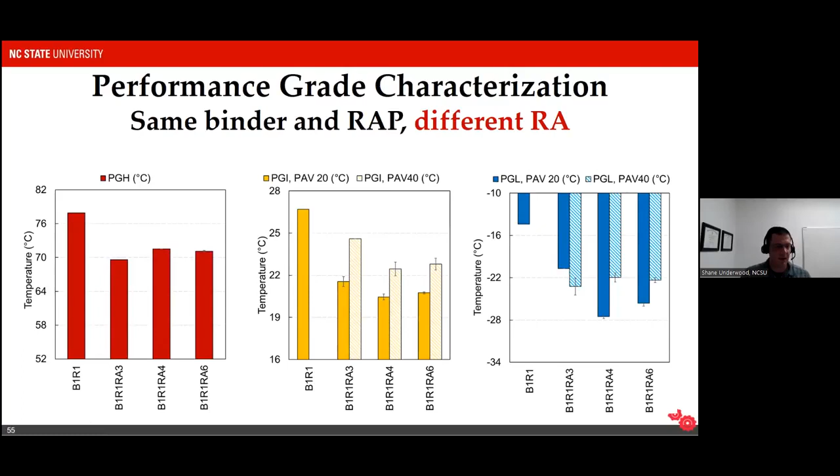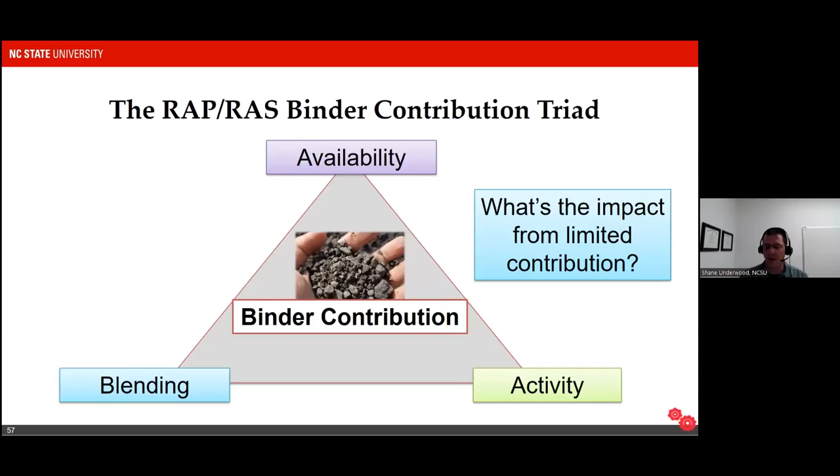Now, the last thing I want to mention here today is, what is the impact if we do not get good contribution from the mixture? Now, this is work, again, that Dr. Castorena has been looking at quite a bit. And what she's been able to devise is a methodology to design the mixture so that we better leverage known contribution levels. She has developed a technique where she can create or identify the availability of the asphalt binder and adjust the gradation in a way that gives us a similar voids in mineral aggregate.

And as a result, we can actually see improved performance by carefully engineering the asphalt mixture, taking into account that not all binder contributes to performance. Again, the basis of this is, we need to think very, very carefully when we deal with these recycled materials about how they interact with our virgin materials and yield good or, in a negative case, bad performance.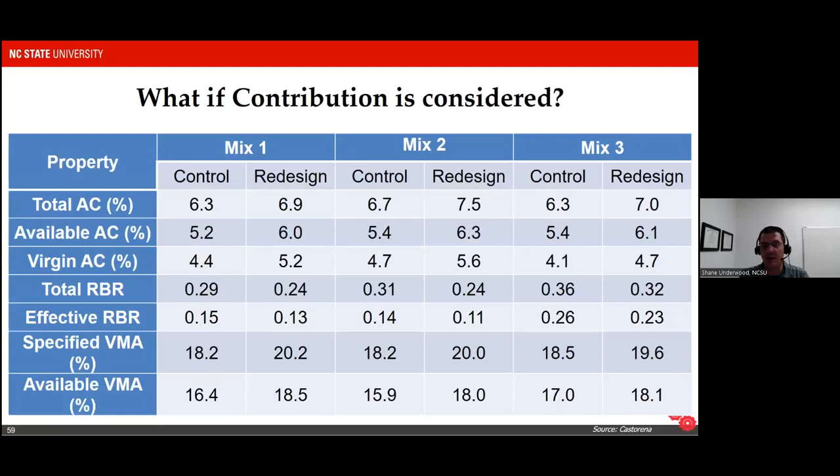And then what she found was actually, as judged by the CT index, she could actually increase the amount of RAP material in the mix and at the same time improve the performance of that mixture. So the offshoot of this is that it is possible, there is evidence of using recycled materials, designing them very carefully to ensure that their performance is not negatively affected.

But what can't be done is to blindly add in recycled materials and hope that they perform better. Because as we showed in the North Carolina case, when you do that, you run the risk of truly negatively impacting performance. And if that happens, then all of the benefit that you see in using recycling materials may be lost because of increased maintenance costs, increased disruptions to traffic because those repairs are being made, and other negative consequences.

So what I want you to take away from this is we just need to be very careful using recycled materials, not to run into using them for the goodness of their resource consciousness and now end up losing performance and creating actually a worse situation that has more negative impact on the environment and on our economic well-being.

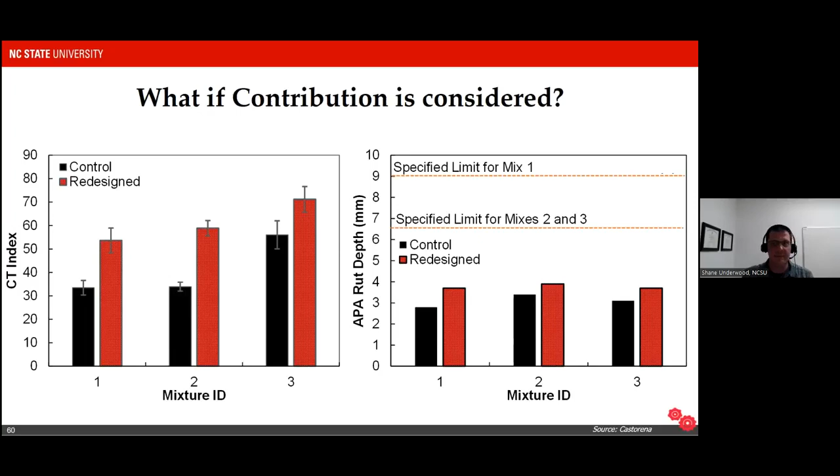I believe these slides are posted, so I put a few additional resources for those that are very interested in this recycling issue. As I noted, there have been many projects on these issues, especially around RAP in the US in the last, I would say, decade. And these are just pointing you to a number of those in addition to what I talked about with the NAPA resources for your interest.

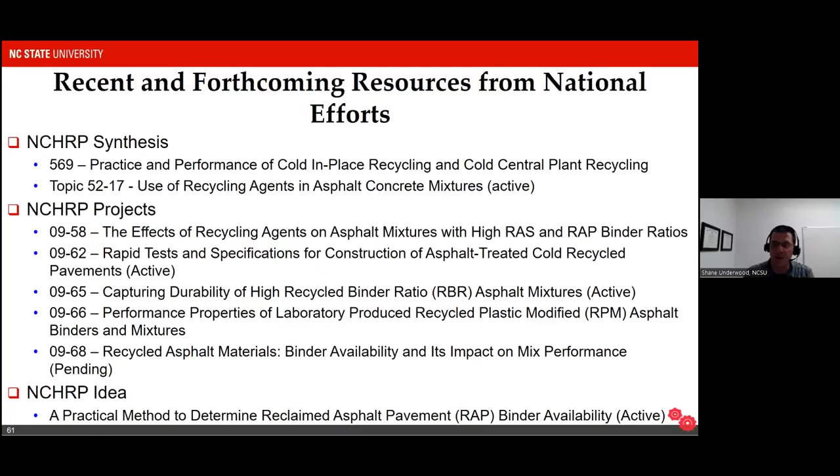I'll wrap up with the last couple of statements. In the US, and I'm speaking to you from the US's perspective, we produce a lot of asphalt mixture on a daily basis. We should, as good stewards of the taxpayers' money, and I think of stewards of good environmental consciousness as civil engineers, do our best to improve that production in ways that make positive reuse of waste streams. But we cannot and should not allow our roads to become linear landfills where we're dumping any and all waste streams into those pavements as a way to get rid of them.

What we've seen from the science and the literature is that it is possible to positively reuse those materials in ways that are mutually beneficial, not only to society at large, but to the asphalt paving industry as a way to cut costs and actually extend what can be done within the funds that are available with respect to providing smooth, safe, reliable roadways.

But it is paramount that we consider how our decisions affect the long-term performance. That is super critical. Without that thought in our minds all the time, we simply are going to be running the risk of having more negative consequences than positive benefits. And that is not what we as civil engineers, or at least I as a civil engineer, feel is an appropriate use of our expertise and our experiences.

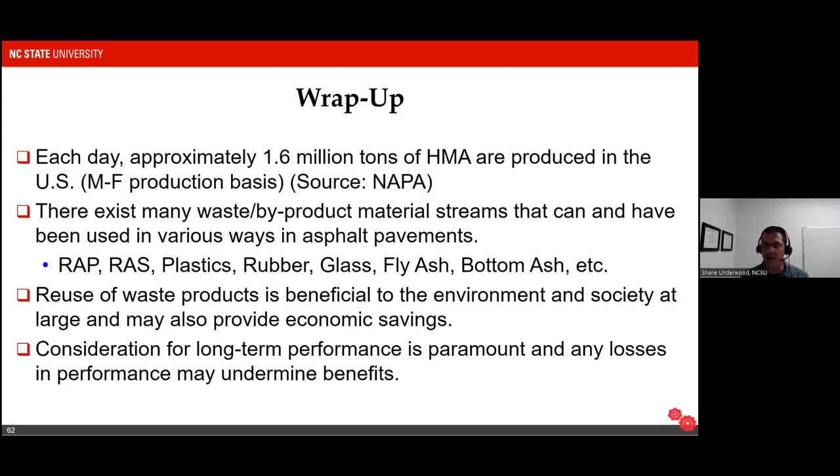Thank you very much, Professor. We have two questions in the chat. The first question is, would it work with rubble ash, or would it work as rubble ash or fly ash, referring to RAP and RAS, I guess?

So I don't know the context of that question with respect to RAP and RAS. One of the things that, when I hear rubble, I think about some of the plastic modifications and using some of the more cross-linked polymers and plastics. I think that's a possibility to use those materials in the same way, basically as an aggregate replacement. I'm not familiar with people using rubble ash as an aggregate replacement.

One of the challenges is, how do you control those materials reliably? We can certainly add waste materials into asphalt concrete, but we need clear specifications and standards to deal with them. In the case of fly ash, as a direct replacement or a direct addition to the asphalt mixture, there are examples of using those. So specifications and standards exist, and those certainly can be directly used. And that's in asphalt. We can use them in Portland cement concrete as well.